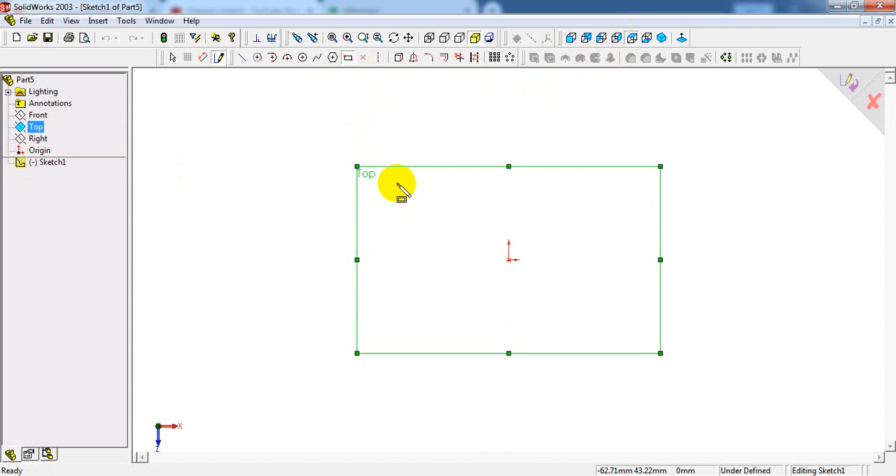Select part, select OK, select top plane, top view, sketch, take rectangle command, draw one rectangle in this way. Origin point must be in the center. Make dimension.

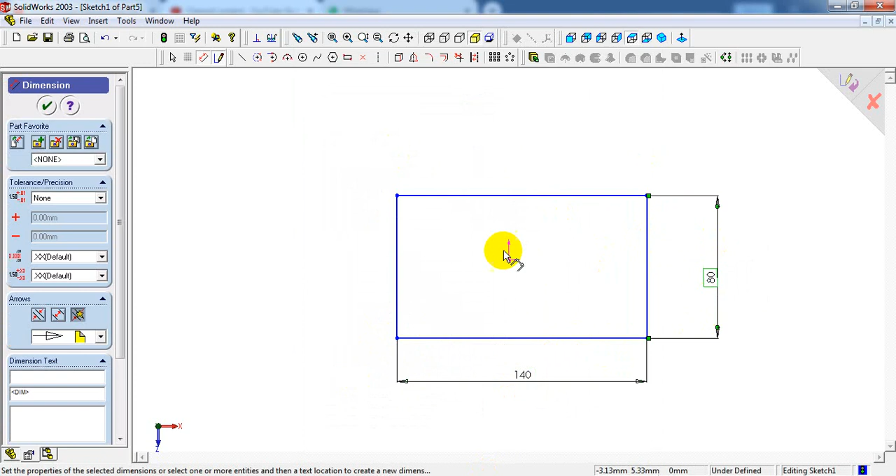From top view we can see length and width, 140 into 80. Length as 140, width is 80. Next we have to make this origin point exactly in the center. Select origin point and this line, make it 140 divided by 2.

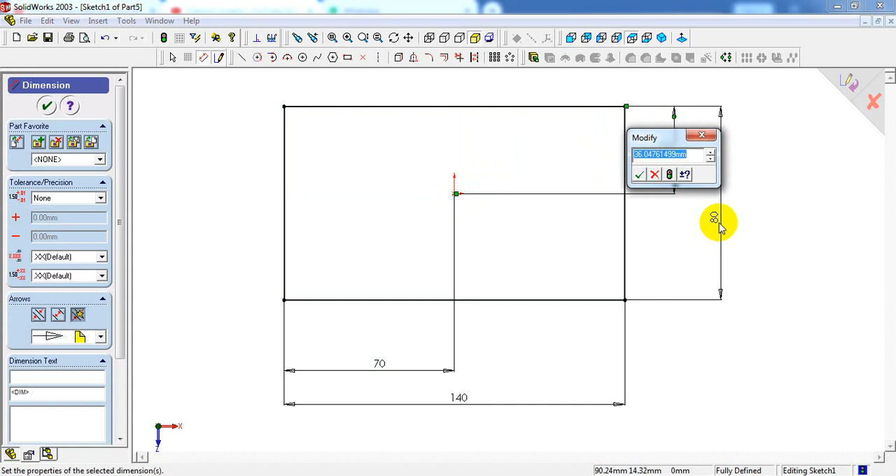Next this horizontal line to origin point, make dimension as 80 divided by 2, that is 40 mm. Now take circle command, draw one circle here and one more circle here.

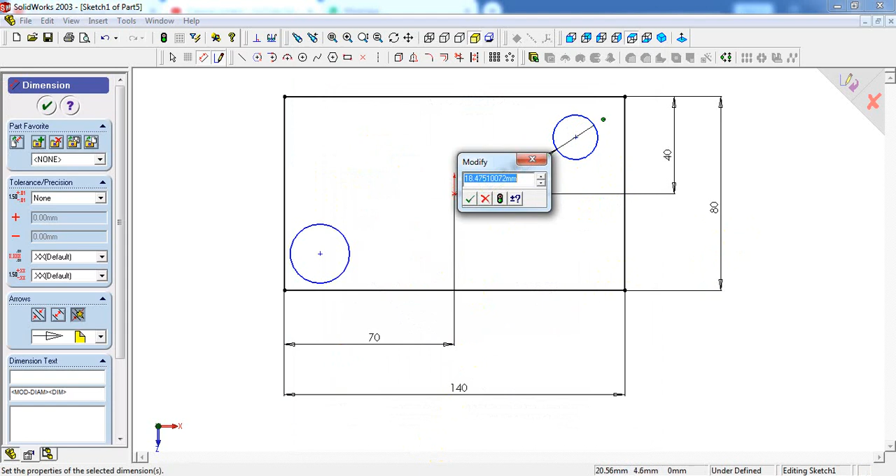Make dimension as shown in the figure, that is diameter he has given 20 and distance between this corner to circle is 15 mm. From this right corner to the circle it is again 15 mm. Same dimensions for this circle also. Make dimension, diameter of the circle is 20 mm.

Enter 20. Next select circle and this line. The distance between this circle and line is 15 mm. Again select circle and horizontal line, it is again 15 mm. See here diameter 20, distance from circle to the line 15, and again from circle to the line is 15. Repeat the same dimensions for this circle also.

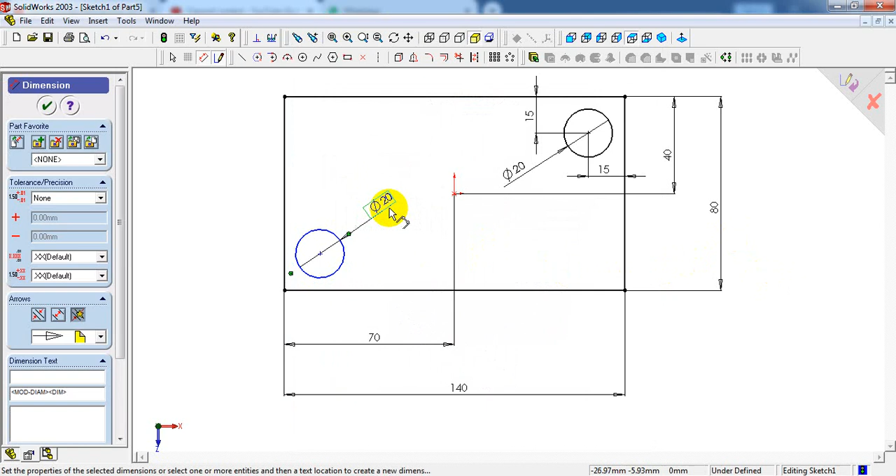Diameter 20, distance from circle to the horizontal line 15, and circle to the vertical line, make the dimension as 15. Now select isometric view, extruded boss base. Base height thickness is 20 mm. Enter 20 and select OK.

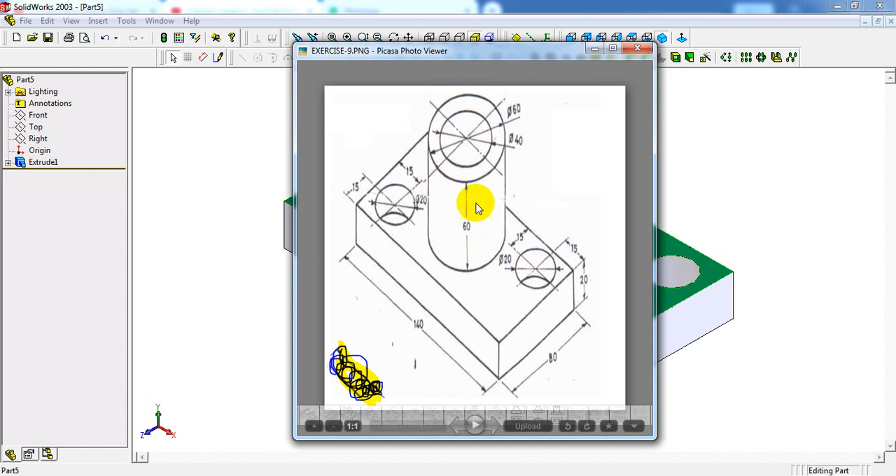Next select top face. We have to draw this circle. At a time we have to draw both the circles. One is diameter 60 and diameter 40, and we have to do extruded boss base height of 60 mm. Let's see how to do this.

Select top face, top view, sketch, circle. From origin point draw one circle and one more circle from the origin point. Make dimension, outer diameter circle is 60 mm, internal diameter circle is 40 mm.

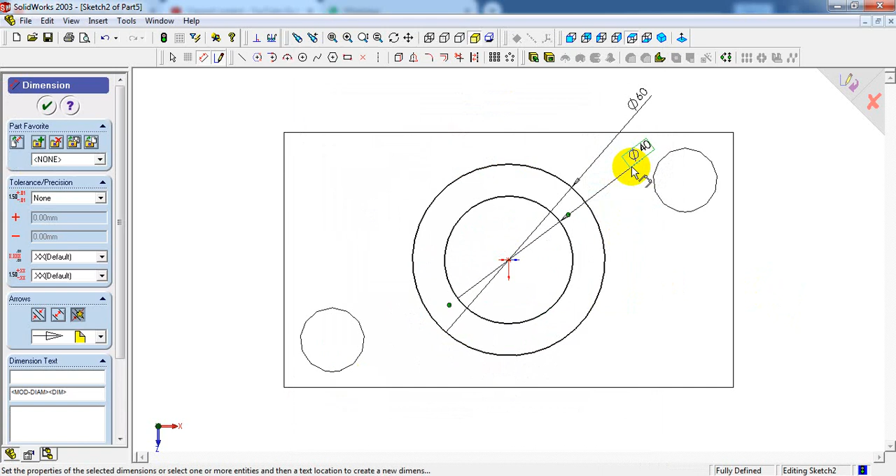Now select isometric view, extruded boss base, extrude a height of 60 mm as shown in the sketch. Select OK. This is the 9th exercise.